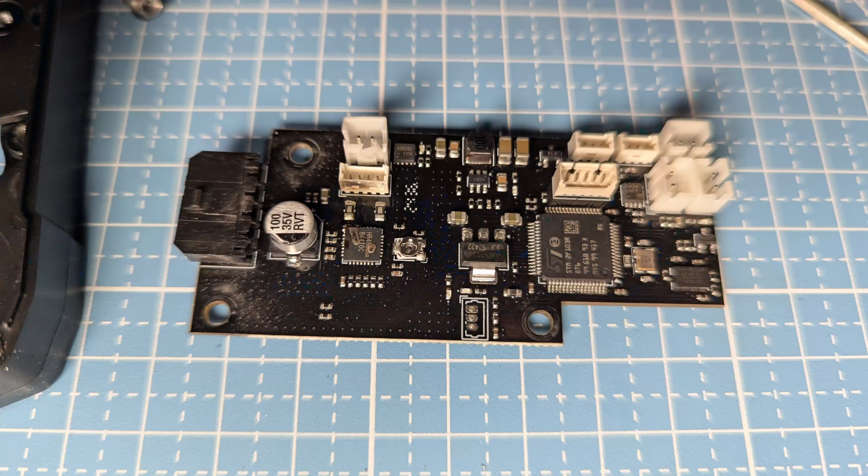I encountered problems during the conversion, some caused by my impatience, like this destroyed build plate, or the ChromaHead breaking after a few successful prints, leading to a burnt PCB like this one. But I provide tips that may help prevent and solve these problems.

Watch the complete videos so you don't miss them. You will also see why I'd rather continue using the KCM with one of my other 3D printers instead of the K1.

First, let's see what you get with the KCM-Set. The biggest box contains the Klipper Chroma module, referred to as KCM module for the rest of the video. We also get a 24 volt 5A power adapter and cable and USB-A to USB-C cable to connect your 3D printer, as we will see later.

In the next box is the ChromaHead. It's what approaches to be one solution for all, because it will replace your 3D printer's printhead to provide what's necessary to print with multiple colors.

Then there's the 8-in-1 module to feed the filaments into the ChromaHead. We don't need the metal part for the K1, however, it is required when installing the ChromaHead on a V-slot 3D printer like the Ender V3 or similar.

The box contains a cable to connect the KCM and the ChromaHead that provides power for the head and communication between them. Then some small parts, 4 screws to mount the ChromaHead, a few tools and some fittings to secure the PTFE-Tubes, which will be pushed into the 8-in-1 module.

Finally, the last 4 boxes. Each contains a CX1 extruder, a PTFE-Tube, a cable to connect the extruder with the KCM module, and some small screws. The metal sheet and the T-nuts aren't needed for the K1.

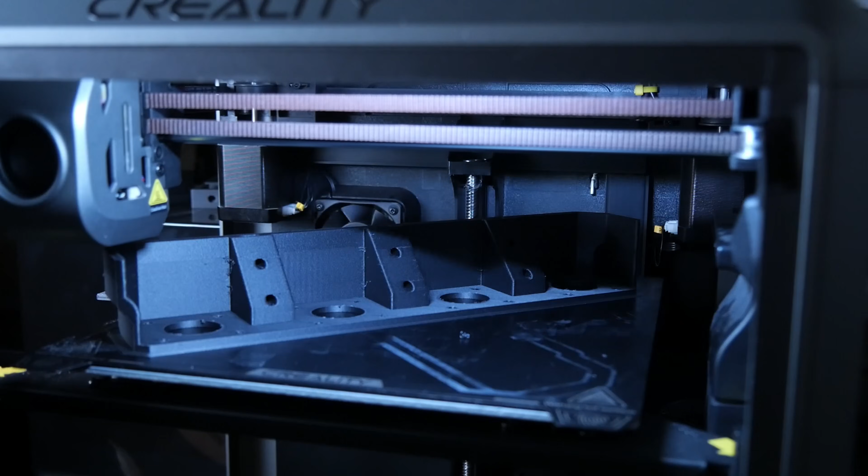An adapter plate is required to install the ChromaHead on the 3D printer. I also recommend printing the parts for the extruder mount. Unless you have a second 3D printer, you should print both before uninstalling the old printhead.

I printed the STLs provided for the K1 in PLA CF. Though the extruders can get a little hot, I had no problems with it. Maybe PETG would be a better choice for the extruder holder.

I don't have a proof of what caused my first ChromaHead stepper driver to burn. I may have gotten a bad batch of the ChromaHead, my K1's USB hub is faulty, or a combination of both. I assume the problem is not a general problem of the ChromaHead because I haven't seen or read of anyone else with such a massive failure.

The few other reports I found were about less severe USB communication problems, but not a broken ChromaHead like mine. I got it replaced by warranty after contacting CoPrint support and showing them what happened.

The documentation was one of the most criticized things when CoPrint started selling the ChromaHead KCM sets. At Formnext 2024 I was promised that they would work on the wiki content. As we are updating every week actually.

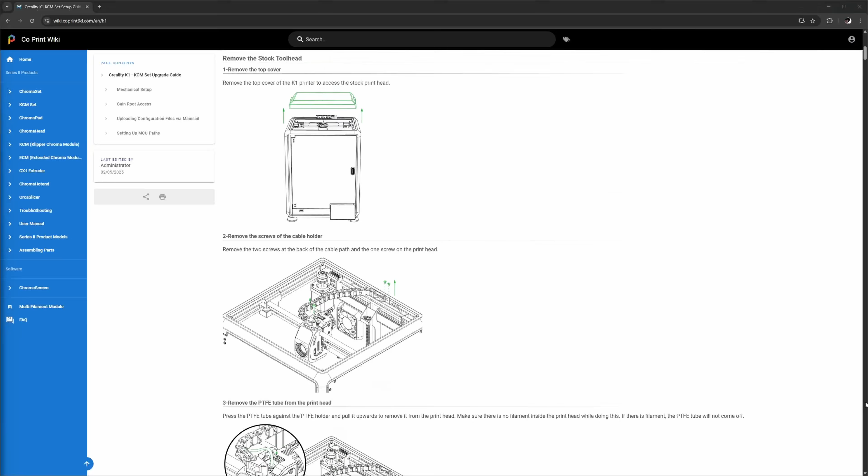It has improved a lot since, so it's time to check if one can get up and running by following their step-by-step guide.

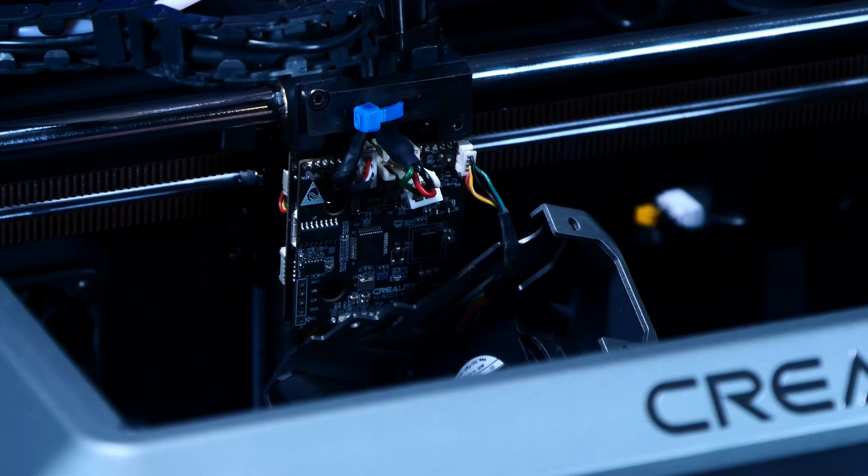Before you start to uninstall the old printhead, you should make sure that you have rooted the K1, because you will run into a trap if you don't do so, which isn't mentioned in the wiki. You won't be able to access a menu to root your K1. Okay, enough said, let's start the procedure.

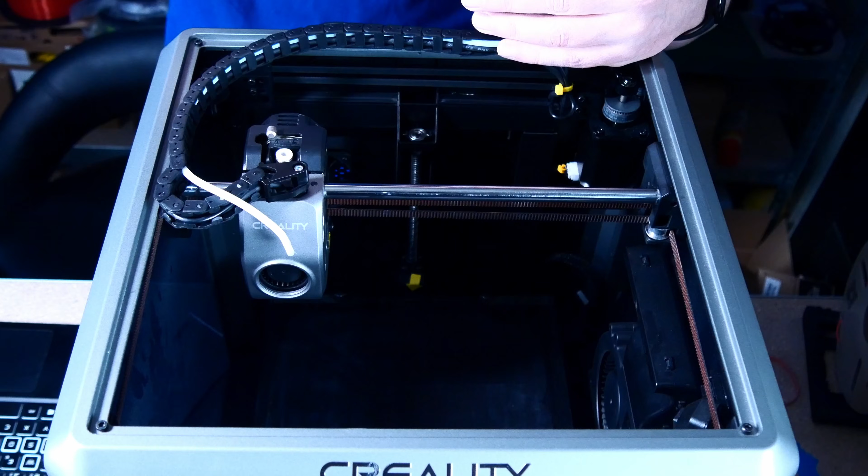Start by removing the 2 screws of the cable chain holder on the back side. Then remove the one holding the cable chain to the print head.

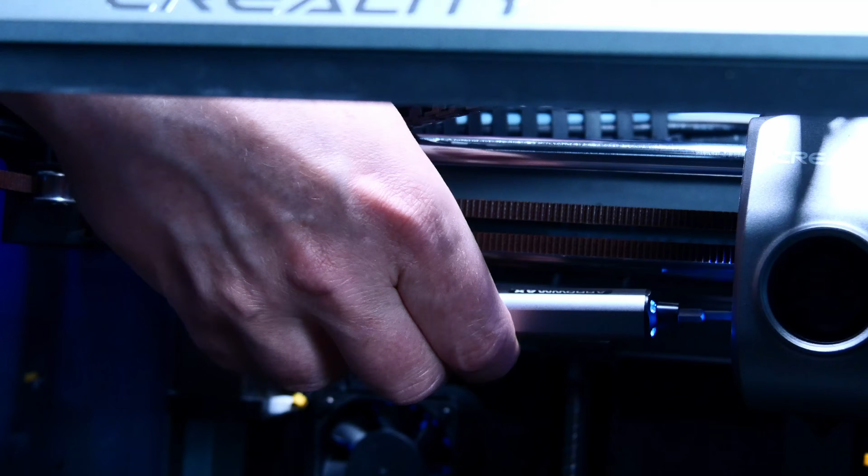Now remove the 3 screws on the right side of the print head and the 2 screws on the left, which hold the cover and the extruder motor. Once the screws are removed, you can remove the cover.

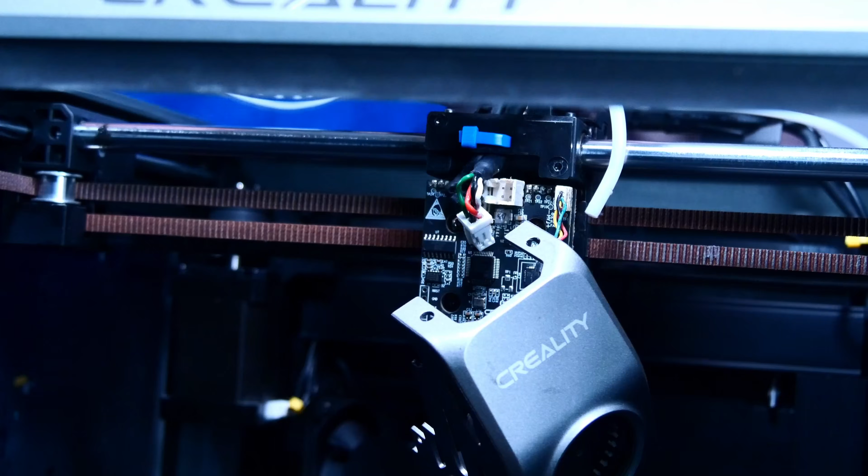Then disconnect the main cable from the control PCB. Be careful because the connectors are glued in - you may have to soften the glue using a heat gun. My cable is secured with a bracket, which I must also remove.

Once the connectors from the cable chain are unplugged, you can move it to the back. We don't need it for the KCM set. Next, remove the cover from the extruder motor and pull the motor out.

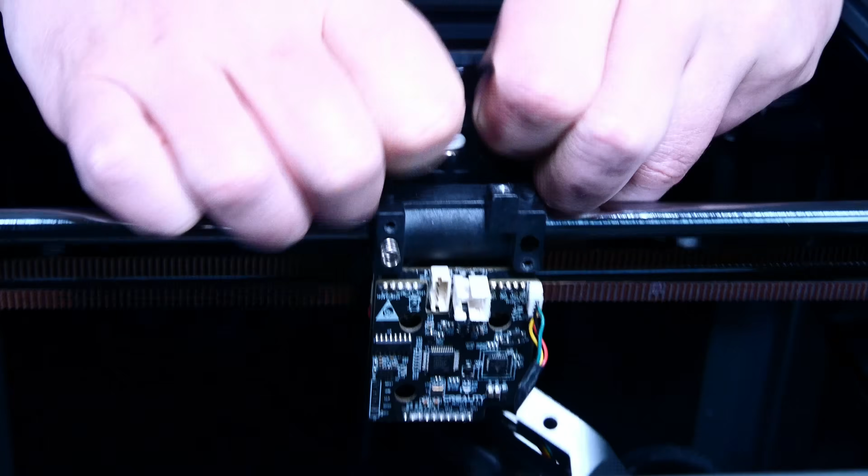To remove the control board, loosen the 3 screws holding it. Then remove the thermistor and heater cartridge connector.

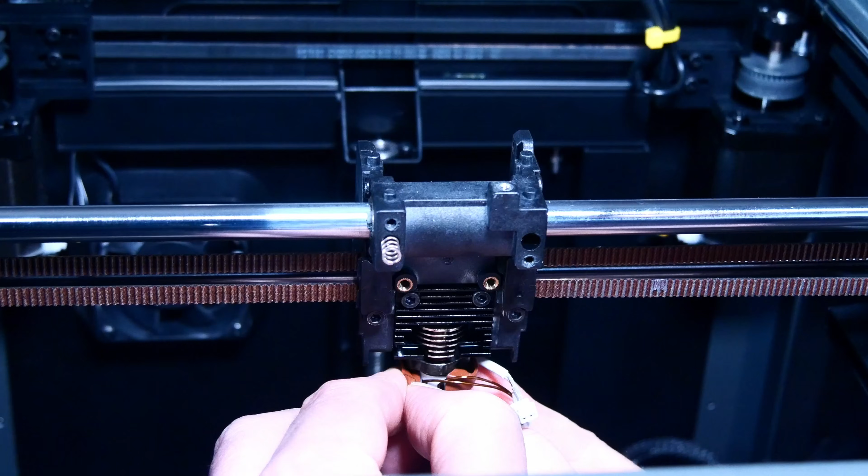Uninstall the Hotend by pulling off the silicon sleeve and removing the 2 screws holding it. To complete the disassembly of the Hotend, take out the heatsink, which is held in place by the last 2 screws.

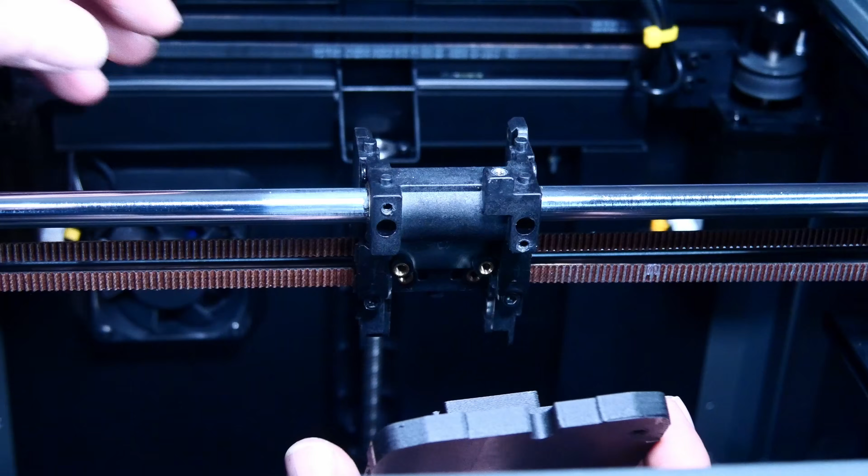To mount the ChromaHead, you need the adapter part that you printed beforehand. If you forgot to print the required parts, no worries.

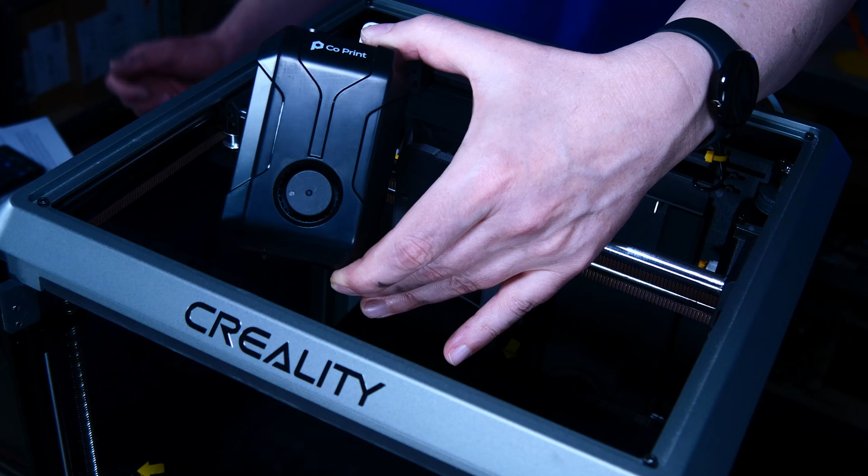Now take the ChromaHead, remove the front cover, position it on the adapter and use the 3 screws from the supply bag to fix it.

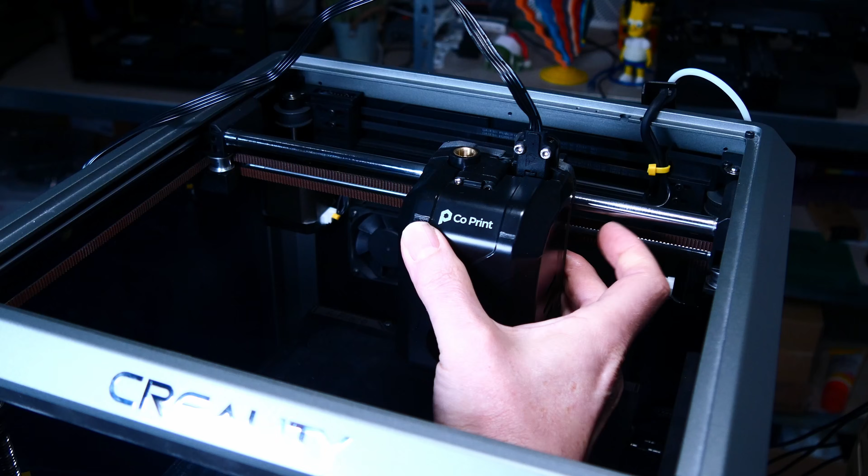Take the ChromaHead connection cable, plug it into the connector and use the 2 screws to hold it securely in place. Put the magnetic cover back on. To finish the ChromaHead installation, you can also mount the 8-in-1 adapter now.

Next, let's prepare the extruder mount. The CX1 extruders come pre-assembled. We have to separate the extruder section from the stepper motor to mount them to the extruder mount. To do so, remove the 3 screws that hold them together and pull off the top.

I have already prepared that for all my other extruder motors, so we can proceed with mounting them to the extruder mount. Position the stepper motor from the bottom, matching the hole with the connector facing outwards, and put the top part onto it. Fix it with the 3 screws and repeat the procedure for the remaining motors.

And the last motor before we finish the extruder mount.

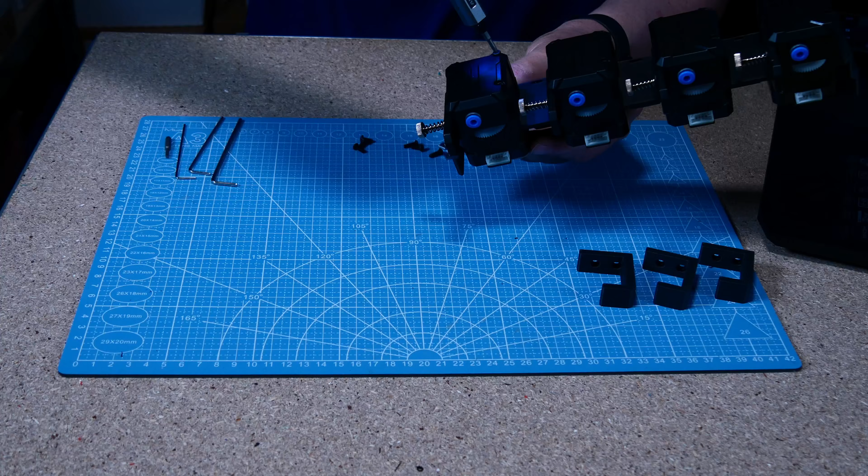Now mount the holders. I printed the extruder mount that uses square nuts which slide into the slots on the sides. If you printed the version without the slots, then you have to use 3 mm nuts to mount the holders. Here's the finished extruder mount for 4 CX1 extruders ready to get on the K1.

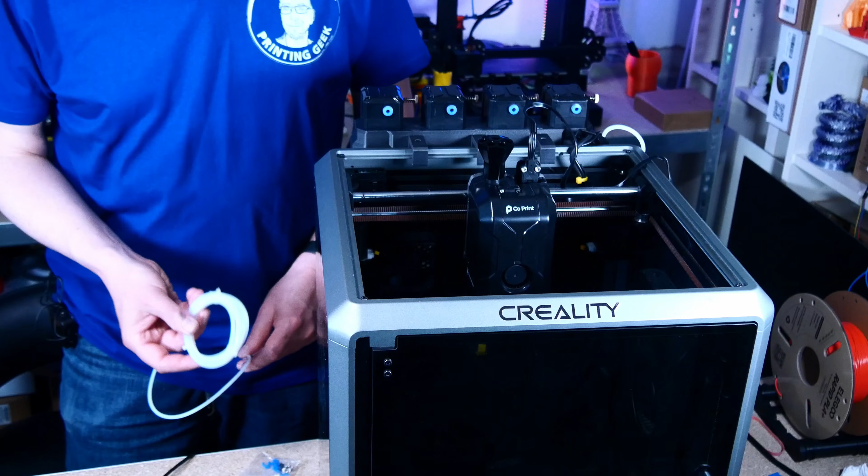Then, to install the PTFE tubes, take them and push them into the CX1 extruder fittings. Now insert the black fittings into the holes of the 8-in-1 adapter. Next, push the PTFE tube ends from the extruders into the fittings. To prevent the tubes from getting pushed out, secure them using the blue clips.

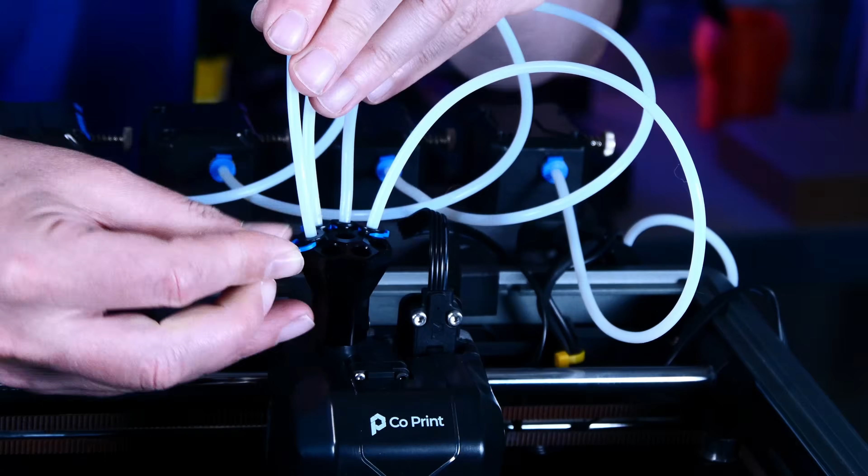I use this PTFE tube organizer, which I designed after not being satisfied with the provided one, to hold the tubes together and, more importantly, keep the head cable away from the print area. I put a link to it in the description.

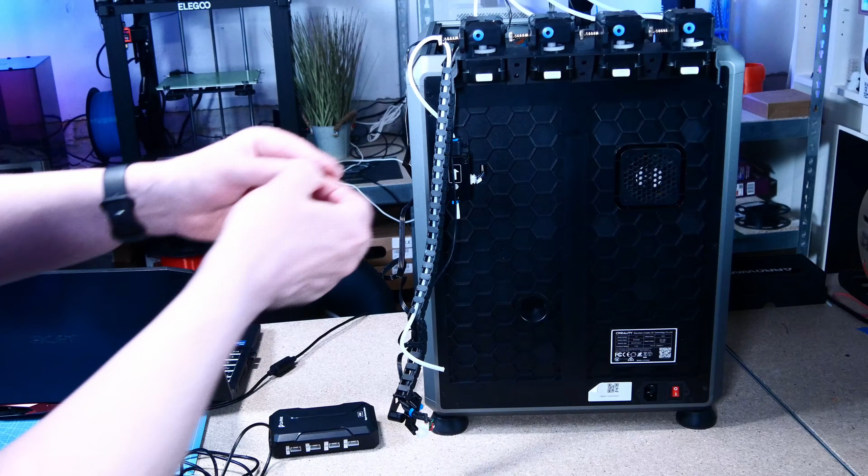I also labeled the 4 extruders and the KCM module's motor connectors with E0 to E3 from left to right. The labels help keep things clear when we configure Klipper. Then the extruders are connected to the KCM module using the motor cables according to the labeling.

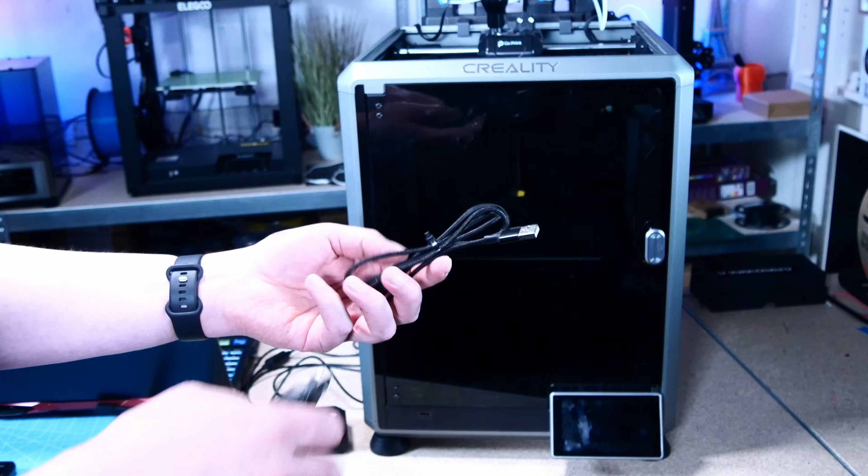Let's finish the hardware setup by connecting the KCM module's USB cable, the ChromaHead's cable and the power adapter. Plug the USB-A connector into your K1 and the USB-C connector into the KCM module. Then plug in the ChromaHead's cable and finally the 24-volt power supply.

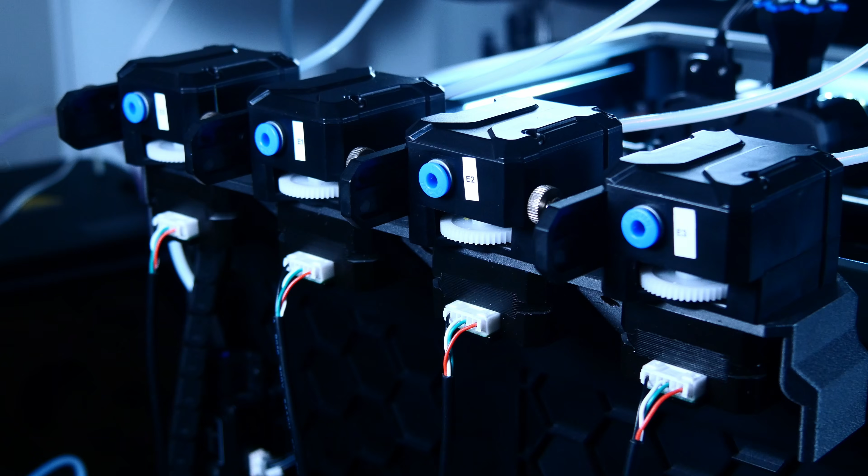Repeat this for the extruders T1 to T3. If the extruders are not moving as you assigned them, reconnect them in the correct order.

Next, load the filament. Pull the lever of the extruder and push in your filament until it reaches the top of the 4-in-1 module. Feed in the remaining colors the same way. To load the filament, heat the nozzle to the filament printing temperature.

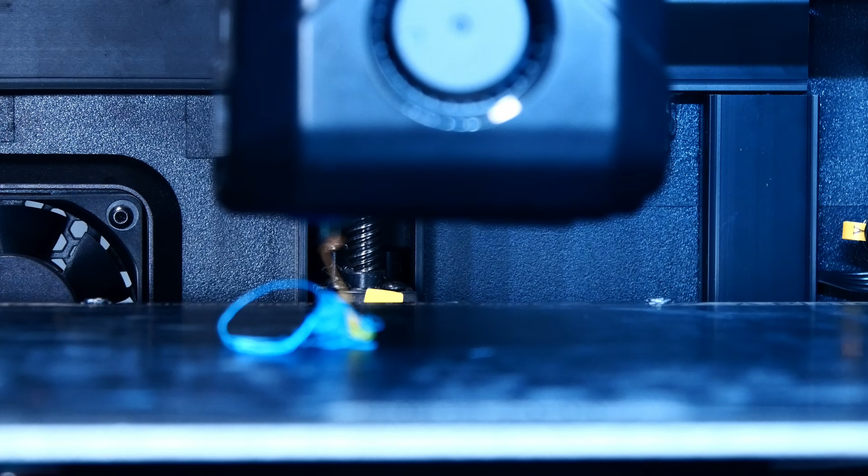Then, in the macros widget, click the Set Filament Position macro. It's best to start with extruder T3. Click T3, then click Extrude. Repeat clicking Extrude until the filament comes out of the nozzle. Then click on Set. You should hear the filament cutter cutting and retracting the currently loaded filament.

Next, click T2 to activate it. Click Extrude until the filament loaded in Extruder 2 comes out of the nozzle. Repeat the procedure with Extruder T1 and finally T0. That way you have loaded the filament in Extruder T0 and are ready for 3D printing.

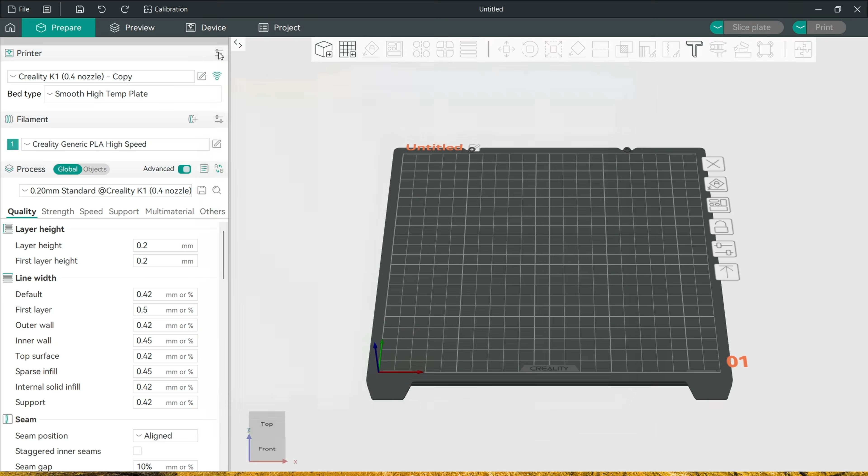Update or install Orcaslicer by downloading the latest version from its GitHub page. On a new install, you'll see a setup wizard where you can select the CoPrint printer profile. If you updated Orcaslicer, create a new printer profile using the CoPrint profile. In both cases, open the profile settings and adjust the build plate size from 220 x 220 to 197 x 163. That's necessary because the ChromaHead is larger, which unfortunately reduces the available print size.

Here I loaded a colored model for printing. I assigned the colors using the filament menu on the left. After slicing, the generated G-code can be exported and printed with the modified K1.

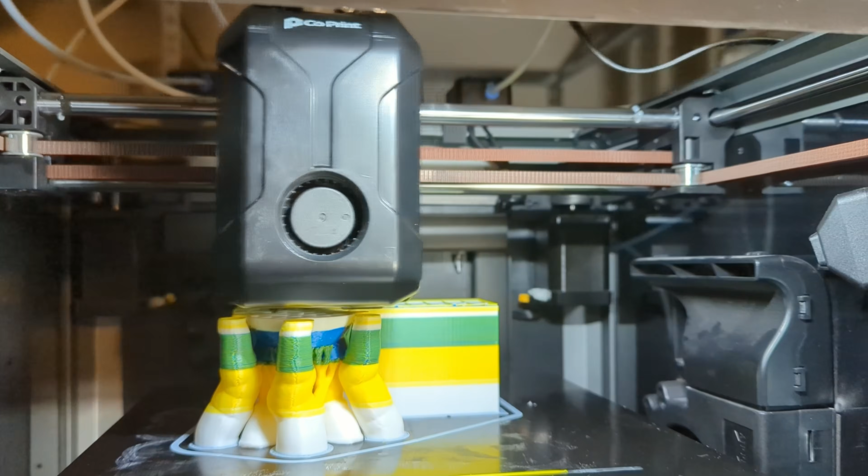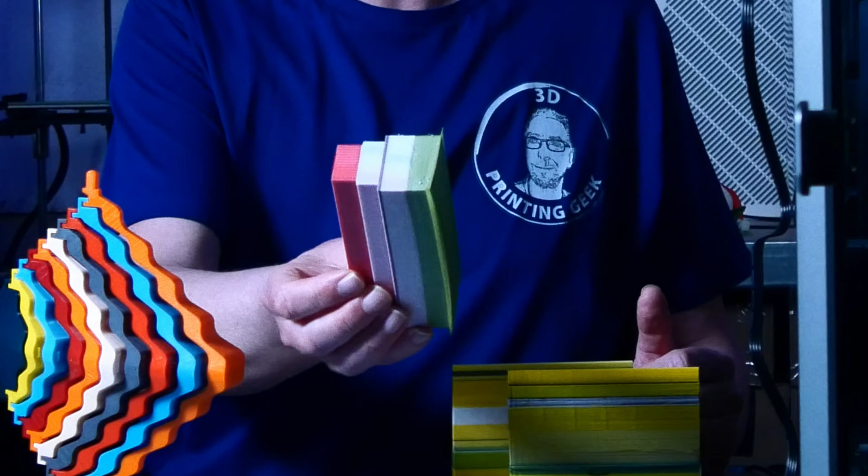3D printing in color extends the already existing creative potential of these machines. The downside is that the printing times and the plastic waste produced increase drastically due to the need to purge the nozzle on each filament change. As you can see here, the ChromaHead's print quality is excellent. The color bleeding in the print can be addressed by adjusting the purge volumes in the slicer.

Alright, let's wrap this up with some final thoughts on where these multicolor solutions stand, especially focusing on the CoPrint KCM-Set. Looking purely at the cost, the CoPrint KCM-Set is the most budget-friendly option at just $289 for 4 colors, undercutting both Bambu Lab's AMS-S and Creality's CFS. If you are aiming for more colors, the CoPrint Chroma set becomes cheaper than the competition starting at 8 colors.

As you scale up, CoPrint's price advantage becomes even more significant, offering up to 20 colors while the others cap out at 16. For instance, getting to 16 colors costs $736 with the KCM set, compared to nearly $1,200 for AMS-S or CFS.

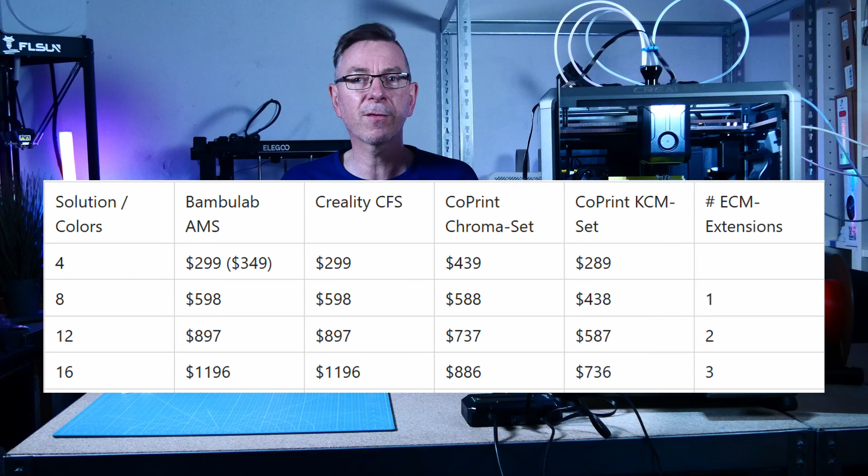So, besides price, how does the CoPrint KCM set stack up? Let's compare the pros and cons to solutions like the AMS-S and CFS. On the pro side for CoPrint: first, cost effective. As we saw, it's cheaper initially, especially the KCM set, and the savings grow with more colors. Second, more colors—it supports up to 20 colors, beating the 16 color limit of AMS-S and CFS.

It has wider compatibility. It works with any 3D printer running Klipper firmware, offering great flexibility beyond specific brands. The Chroma set also has a growing list for other firmwares. It has a modular head—the ChromaHead design makes replacing worn or broken parts easier. It has a quality hot end, including a respected Phaetus hot end.

But there are cons to consider. It's not plug and play. Unlike the user-friendly AMS-S or CFS, the KCM set requires technical skill and knowledge of Klipper for setup and tuning.

Second, you need DIY filament management. You'll need to create your own spool holder solution, rollers or dryer boxes. The AMS-S and CFS integrate this.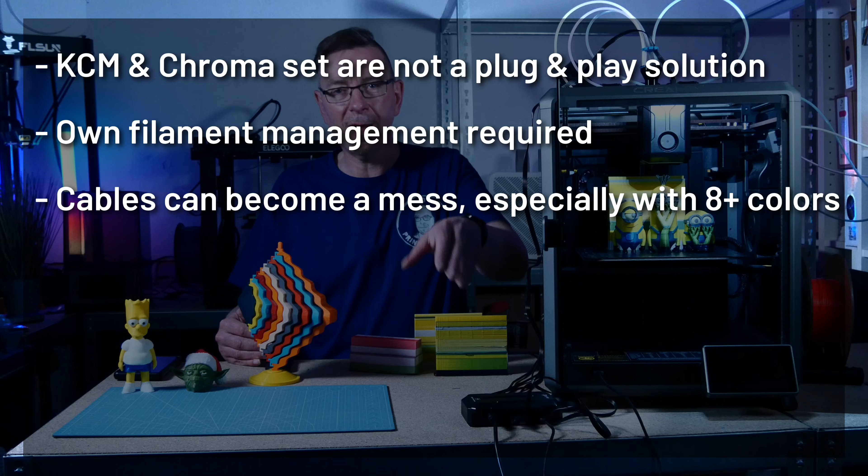Then there's cable management—things can get messy, particularly if you're expanding to many colors. The printhead is very heavy, around 460 grams, and bulky, potentially limiting the max print speeds and slightly reducing print volume on some machines.

Support and documentation: while improving, support and documentation are still evolving and might feel incomplete at times. Hey CoPrint, if you're watching this, I'd really appreciate if you'd clean up your files and wiki pages so that it's easier to follow and that there are no errors.

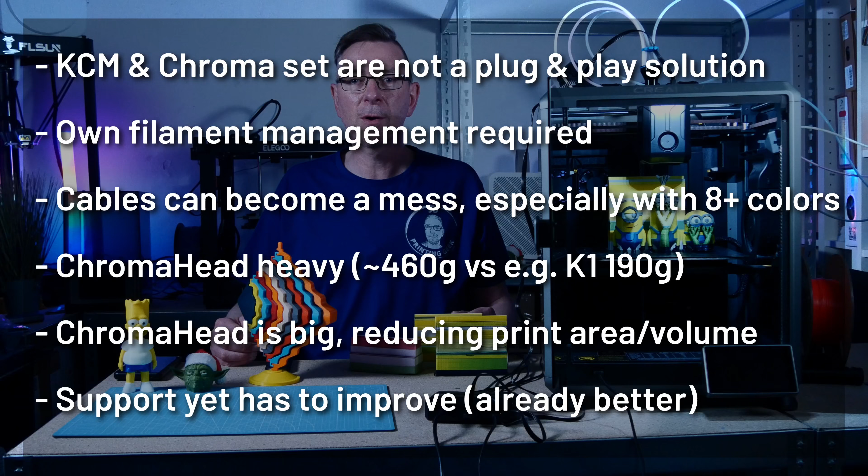Then, early adopter issues. I ordered my KCM set on Kickstarter, and some of the early units had minor issues like power connection sparks or firmware bugs, though these are addressed.

Ultimately, the CoPrint KCM-Set is a fantastic option if you are budget-conscious, comfortable tinkering with Klipper, need more than 16 colors, or want to add multicolor capabilities to a non-Bambu or Creality printer. However, if you prioritize a seamless plug-and-play experience with integrated filament handling and are already within the Bambu or Creality ecosystems, the AMS or CFS might be the simpler, albeit more expensive, route. Choose the best solution for your budget, technical skills, and printing needs.